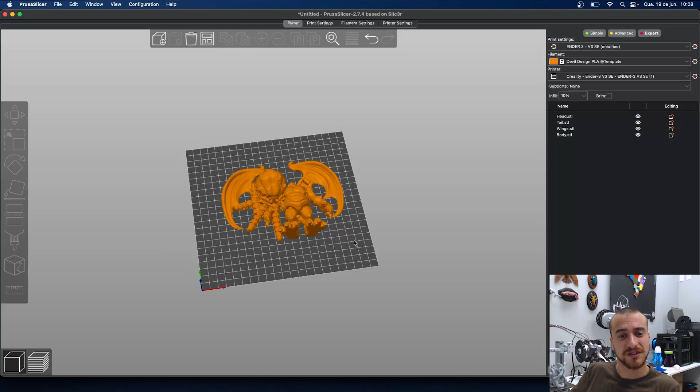In today's video we are going to slice this monster, this Lovecraft monster. Cthulhu, a really nice monster. It is an articulated model, so we have some tips for you to get it right, okay?

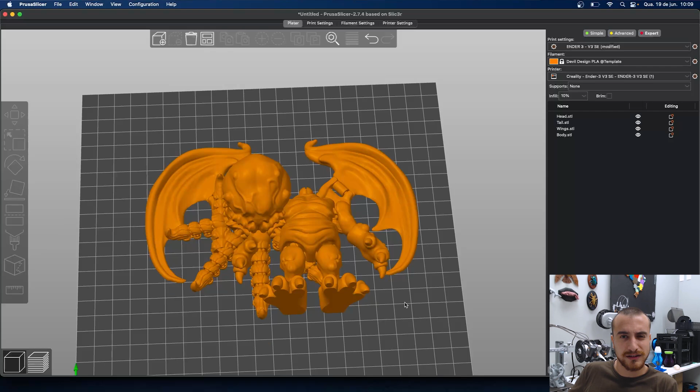So let's go. And here we have the first problem. When you bring all the files to the table, it will be like this, almost a mess. You can press A on your keyboard, or you can just click here in Arrange, okay? So that's it. PrusaSlicer is the software that we are using today. It's PrusaSlicer 2.7.4, and here it's slicing for the Ender 3 V3 SE, our standard printer for How to Slice, okay?

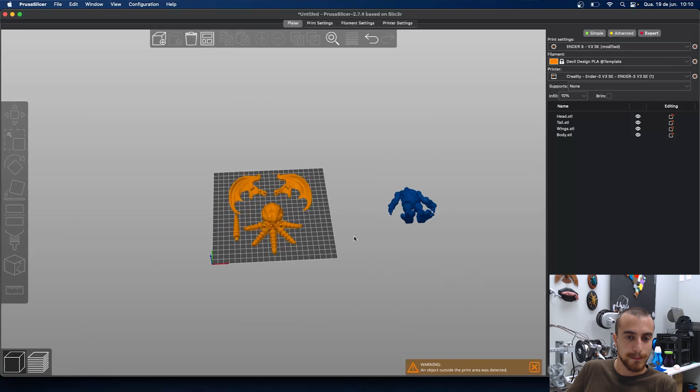So here we have the arrange that Prusa made for us, but my advice for you guys is to print this model one piece at a time, okay? Because our articulated models, as you can see here, have low bed adhesion. These tentacles here have low bed adhesion, low area, so you might have some problems if your bed is not leveled right, okay?

And here is the first tip for you. After you calibrate your printer or level your bed, please don't change the first layer height, okay? This is for every other layer height that you're going to use. For example, if I want to change the normal layer height here, I will not change the first layer height. We'll keep 0.2 because it's already leveled. I already know it's working, and it will not change the aesthetic of the model a lot, okay? So this is why you don't change the first layer.

So keep in mind, your bed needs to be leveled, okay? Calibrated, Z offset, everything just right for printing this model. This head doesn't need any support and is nice to go, okay? But here we're going to print with 0.16 layer height, infill 10% because it's a small piece and doesn't need to be so strong, okay? And here's a little tip for you: print with 3 walls. It will make the articulated parts stronger, okay? Slice now and see how it goes.

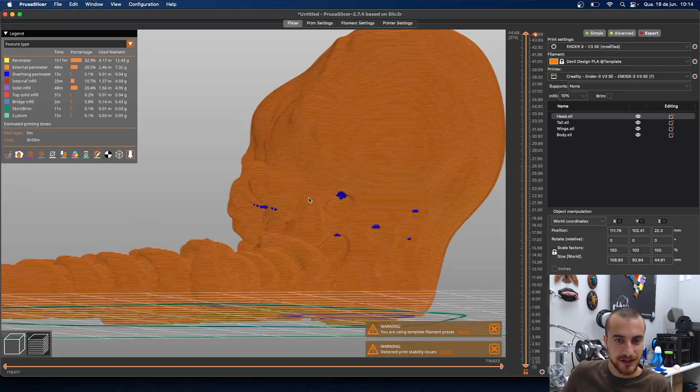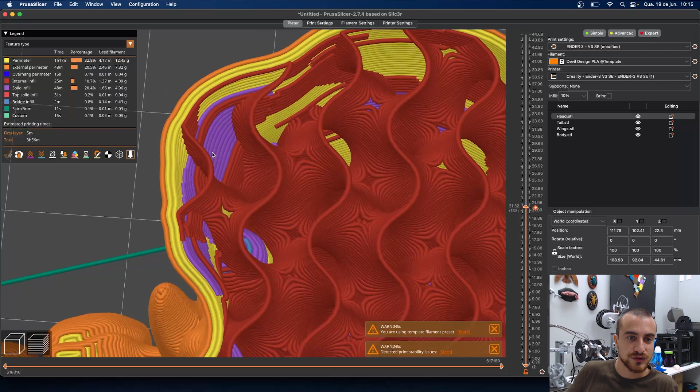And here we have the head of this little monster sliced. As you can see, we have some bridges highlighted in blue in our lines, and orange lines here, which are the external perimeters, as you can see in the legend. In this legend you can see the classification of your lines in each layer, okay? If you move this bar on the right side of PrusaSlicer, you can see the infill, the inside walls, the external perimeters, the solid infill here in purple. It's really nice to analyze these walls, because it will define all your settings for printing, okay? And the legend will guide you through this.

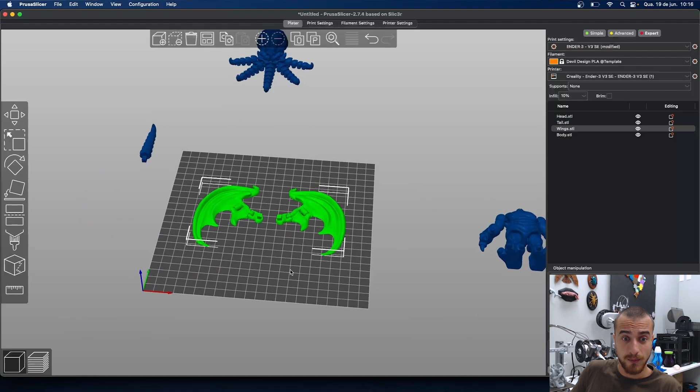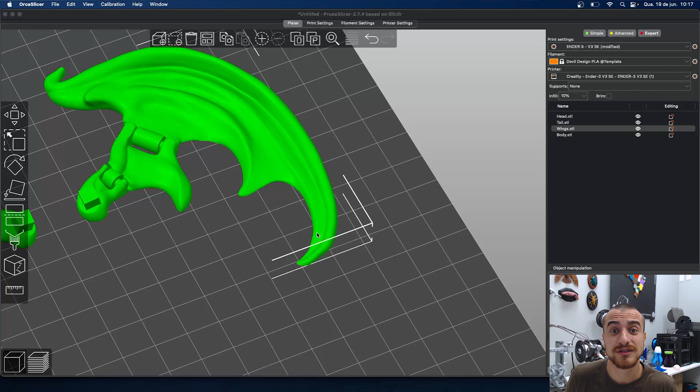And for this one, this is my tip for you. This is for the head. Let's go to the other parts of this model. The wings of this little monster are also articulated, okay? So we'll keep the 3 walls of the last configuration, and you might have some problem here, at this sharp edge of the wing, because it might warp or detach from your build plate. My advice here is to add a mouse ear in this part, but PrusaSlicer doesn't have this configuration for the brim. We will make this in our own way, okay?

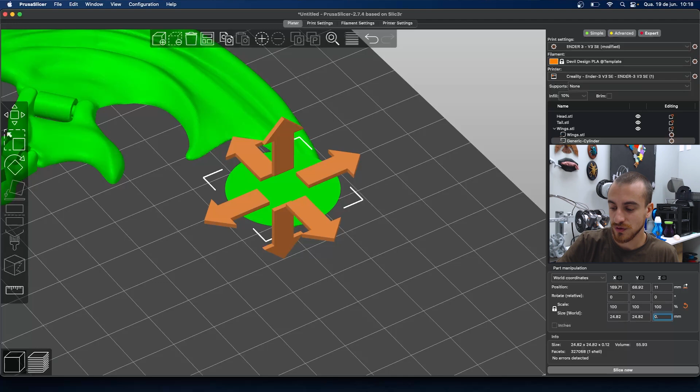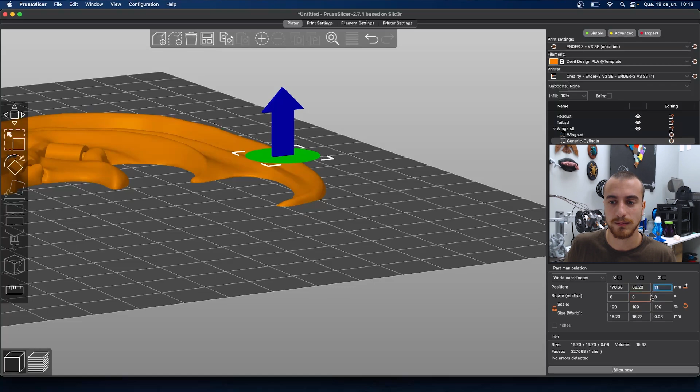Here's a tip for you in PrusaSlicer. Right click on the model and add a part, a cylinder, okay? Like this one, and decrease the height of this cylinder to 0.2. 0.2 is the same height as the first layer, okay? Oh no, I changed it. Oh yeah, Z, okay, just fine. As you can see, increase its size. Let's go this way, and go to the Z position here. We can set it on this side of PrusaSlicer to 0. As you can see, now we have this flat surface at the sharp edge of our wing.

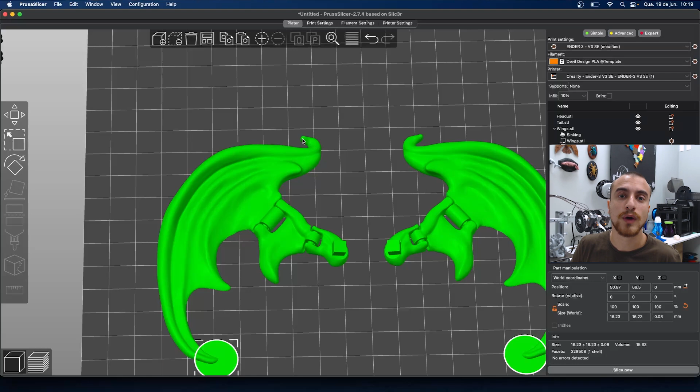So let's clone this part and do the same thing for the other wing, okay? Generic cylinder, let's bring it to this side. And you can do that for any sharp edges where you think warping might happen, okay? So this is my tip. Let's see how it appears in our sliced model. Oh, it doesn't appear at all. Let's see how to change that. Let's increase the height of these parts. The cylinder. Oh, it changed the layer height. Let's go with 0.2. Now it will be better.

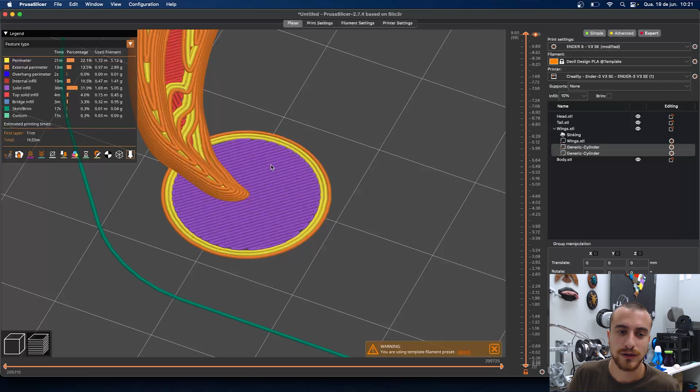Okay, slicing now. After we corrected the position of our mouse ear, now I have this mouse ear that holds the part down. It might help you get better quality, okay? If warping doesn't happen to you, it will not be a problem, but if it's happening, you might use this kind of mouse ear, okay? So let's go to the next file.

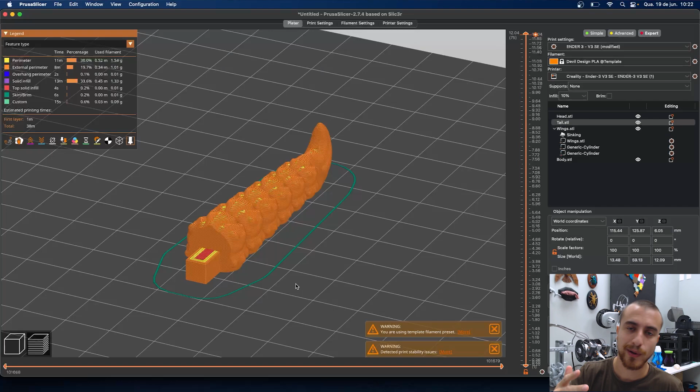And here we have the tail. Whole model, same configuration: 0.16 layer height, 10% infill, 3 walls. A skirt or brim isn't needed, but if you are having problems with bed adhesion, you can add one. It brings you a little more post-processing work, but it's better than losing your print, okay? And that's it for the tail, 38 minutes, just fine.

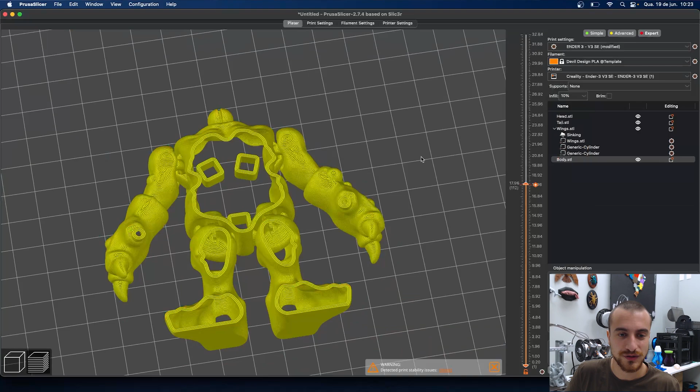And for the body, it's really easy to print that part. Same configuration, same amount of walls. It's articulated, so that's why we are using 3 walls, and that's it. As you can see here, 10% infill. If you increase the amount of infill here, it will take a lot more, so you don't need that. So let's go with just 10%.

That's it for today, guys. Hope you enjoyed today's video. It was about this Lovecraft monster. It's a really nice model you can find on STLFlix.